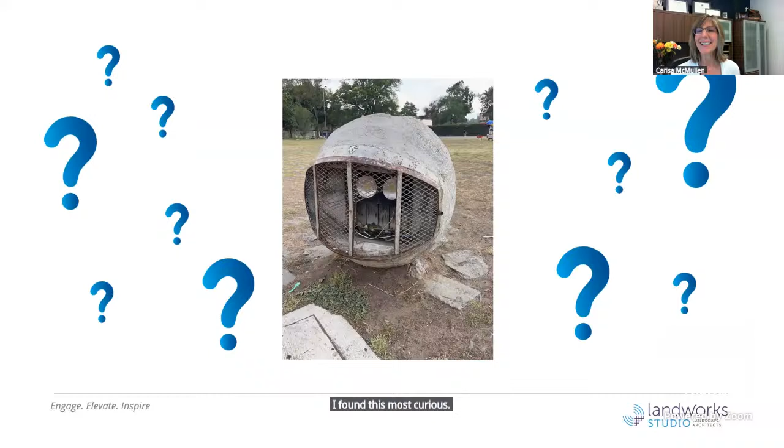I found this most curious. It's not something I've ever seen before, but it's in a prominent place on your university. I can assume it's lighting, and it reminds me of something I might see in Star Wars or something.

As I mentioned, we stayed in Coyoacan as part of our trip, and I was very impressed. I thought it might be worth taking a few minutes to share my experiences in some of the places you've spent time, and reflect on them. The public spaces in what I'd equate Coyoacan to as a suburb of Mexico City, like where our office is now located, were fantastic. But the particular attention and detail to the private garden spaces as we walked around the community was equally impressive. I loved the street experience, the ability to get a coffee in the morning, people watch and visit, and equally grab a beer at the end of the day.

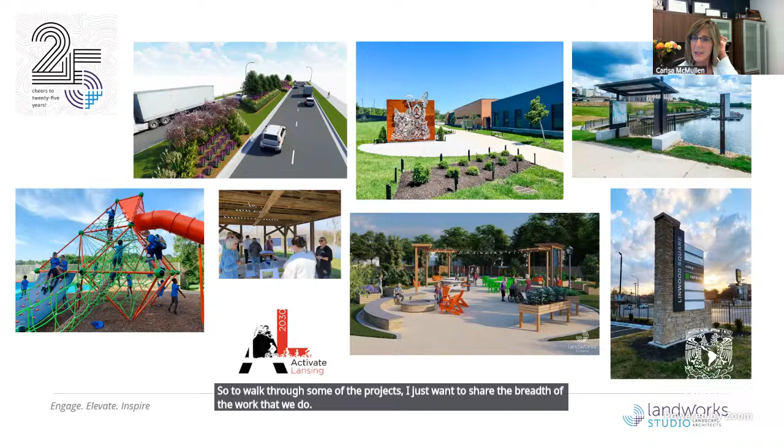So to walk through some of the projects, I just want to share the breadth of the work that we do, because we like to stay as diverse as possible, have the influence as many places as possible. The more diverse we are, the more people we impact with landscape architecture.

So this is a smattering. We like to say our services include transportation and streetscapes. We do commercial and mixed use, parks and recreation. We do signage and wayfinding.

We have an opportunity in that genre to educate. We can do environmental education panels and really establish the character of a community through some of the signage and wayfinding that we do.

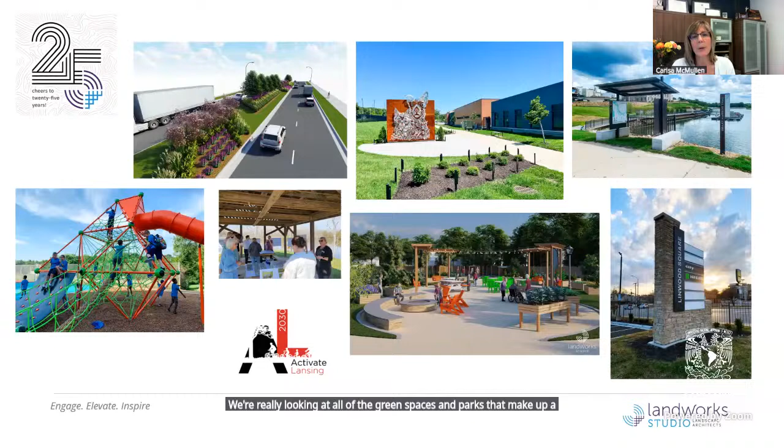Of course, our projects include public engagement, and sometimes that includes branding as we're doing planning documents and those kinds of things. So when we're looking at systems wide, which we do some of in that planning realm, we're really looking at all of the green spaces and parks that make up a community and looking at where the deficiencies are and where we can influence better outdoor spaces.

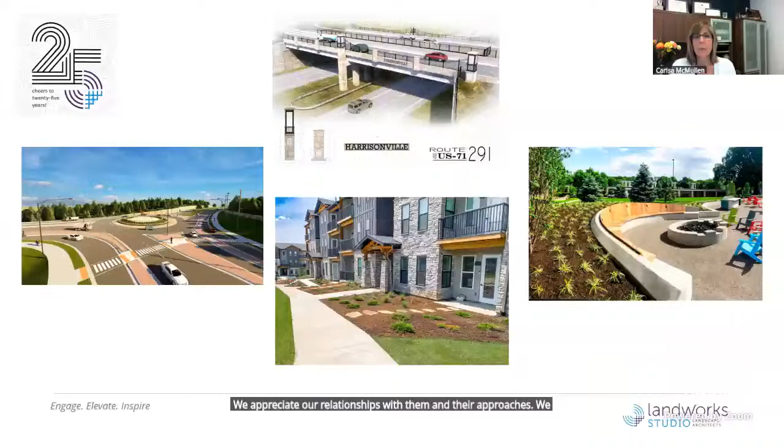A little more specifically, we do support architects and engineers, and we have a great group of people that rely on us to bring our expertise to the projects. We appreciate our relationships with them and their approaches. We've found groups that think similarly to us and really value what we bring to the table.

So we work on larger transportation projects that you see here, where we're bringing art into this roundabout, but really influencing the paving patterns and the plant materials and what that experience is like.

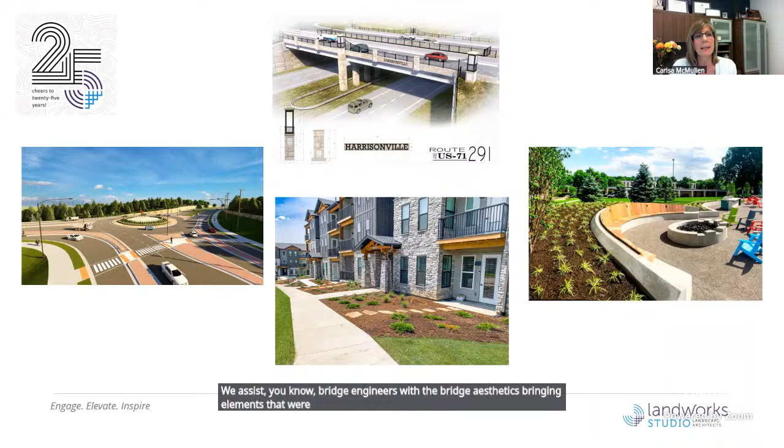We assist bridge engineers with the bridge aesthetics, bringing elements that were maybe historic from the community. These lanterns on the columns on this bridge were something that was representative of something that had happened in this community's history, and we were able to celebrate that on the bridge.

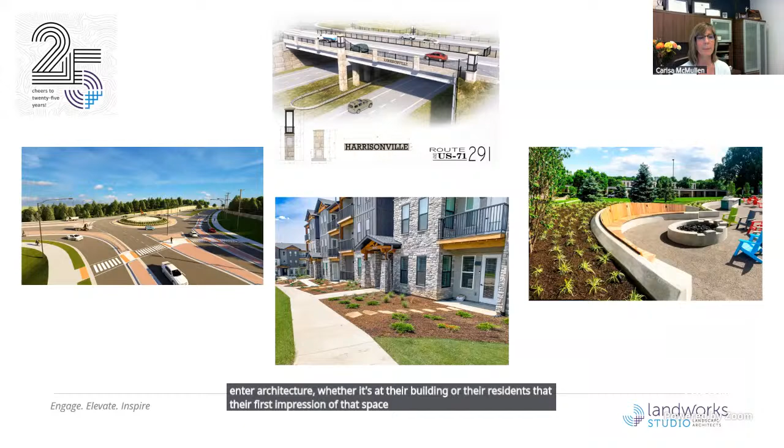And then we work to make sure that the experiences that people have as they enter architecture, whether it's at their building or their residence, that their first impression of that space is really a place that they want to be. As far as work environments, this is a fire pit.

It looks like it might be somewhere in a park, but this is actually in a corporate office park. So this space becomes active during the lunchtime or after hours. If a company wants to host an event or bring their clients, they're able to do that on the grounds of their office park.

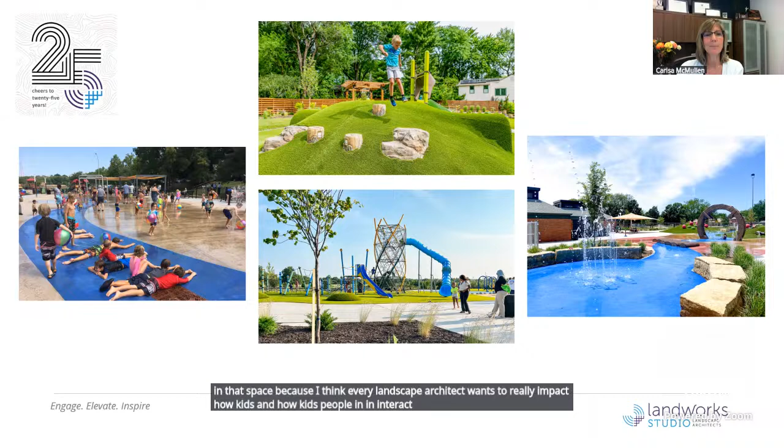Of course, we love parks. We love playgrounds. It gets very competitive in that space because I think every landscape architect wants to really impact how kids and people interact with the environment.

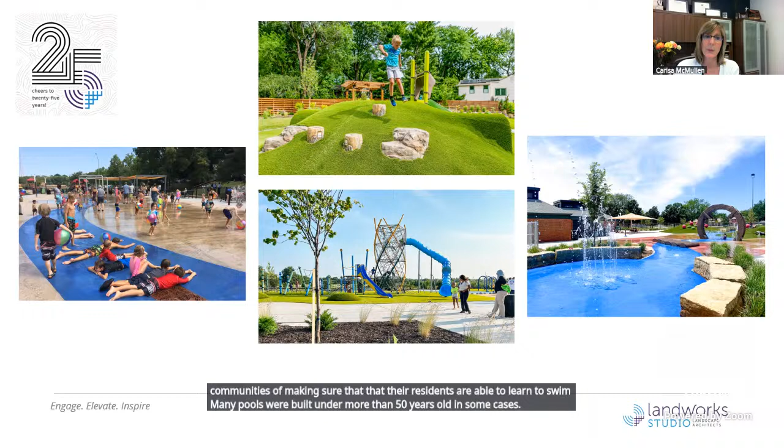We are seeing a lot of pools being converted to splash pads, and I know there is concern among communities of making sure that their residents are able to learn to swim, but many pools were built and are more than 50 years old, in some cases 75 years old, and the infrastructure is failing, and communities just don't have the resources to be able to build new pools in every instance, nor do they have the ability to maintain or staff some of the pools with the lifeguards and the expertise that are required to keep them safe. So in those cases, we're able to convert the pools and provide a water experience in more of a splash pad environment that can be come and go.

And lastly, we do some stormwater management projects. We're brought in to ensure that we're protecting our soils from erosion, keeping the soil from silting into the waterways, streams, and creeks that we have here. We're capturing the runoff and using it in productive ways, thinking about stormwater not as something that has to be dealt with, but how it can be celebrated as an amenity within some of these communities.

In the bottom image, we're filtering water off of a parking lot. This is a trailhead to a bike trail system. We can capture it in the bioswale and filter it out before it even gets anywhere close to the creek.

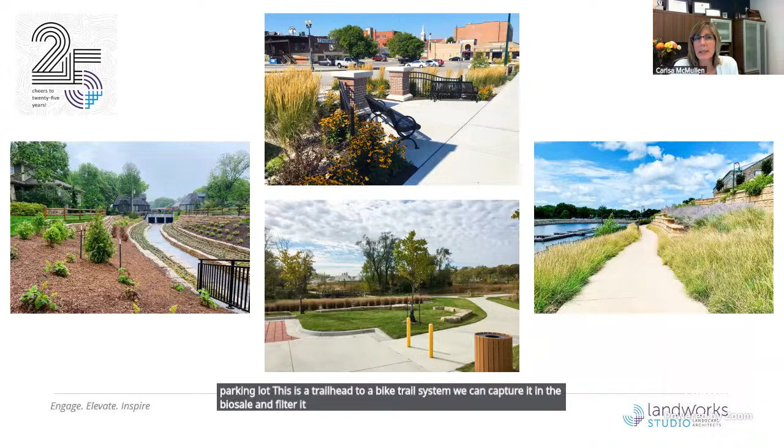The top image is actually a downtown area with a streetscape, and it's fascinating that we were able to put in some curb cuts the way the grades worked. We had a client that really wanted to capture that stormwater, and we were able to create these really nice sitting areas with some nice plant materials utilizing the stormwater that's captured.

And as we've grown, this is our 25th year. You can see that logo up here on this slide. We're able to impact more communities, larger spaces, and really have an influence on more people.

I know Monica is a baseball fan. I don't know if we have any football fans in the audience, but if you know the Kansas City Chiefs, they've had some good successful runs. I'm not a particular fan, but we had the opportunity to work with Patrick Mahomes and his foundation and build a playground in a community that really needed something for the kids to play. So if you know football, you might recognize Patrick Mahomes in that image.

The great part about this, we celebrated the history of Martin Luther King, and we were also able to become a catalyst. The community came out and spoke, and they said the playground is wonderful, and we will look forward to that, but we need access to the park from where we live. There were other infrastructure improvements that they really saw as more important to them. To the city's credit, they stepped up and are now in phases of taking care of some of those other issues as well.

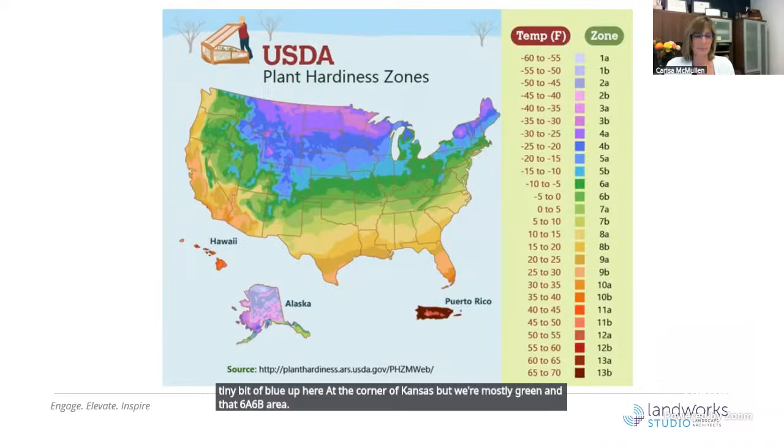And we do have a lot of Western history that we celebrate. Olathe has one of the stops on the Santa Fe Trail. We take great pride in the westward expansion, and we have three different trails that were pretty significant as folks were traveling from the East Coast to find their treasures and gold out west.

We have a lot of frontier military encampments that we talk about, that we preserve, that we share in our outdoor spaces. There are missionaries that traveled through here as well. When you travel through the landscape, you may see a headstone here or there. A lot of people died of cholera as they were traveling across the state, so there are many small cemeteries that still exist.

So while we're not riding horseback to work, we do have various landscapes that we are able to influence. And we stretch from the very rural, mostly on the western edge of that shaded area, to the east, to the more populated. So I thought it would be helpful to put into context where our projects are and how we treat those projects.

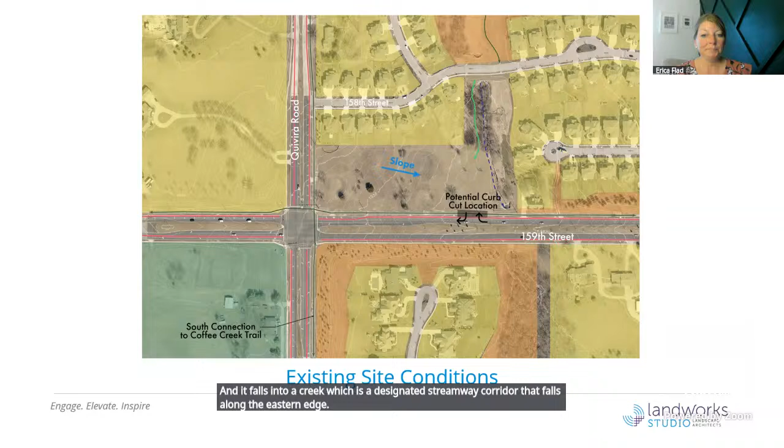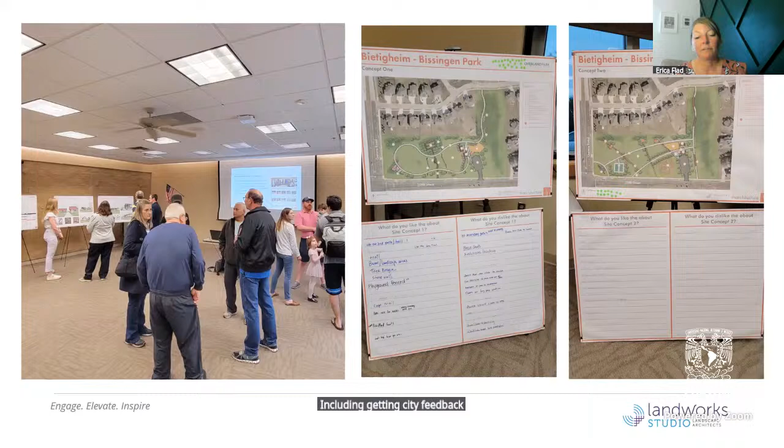This was the last public meeting that we had, and we showed two concepts that we had developed over time, including getting city feedback and feedback from our park steering committee. Generally, the amenities were the same, but we had two pretty different layouts to show, and we asked the residents what they liked and didn't like about each concept, which they wrote down on the boards. We did the same for the architectural styles as well.

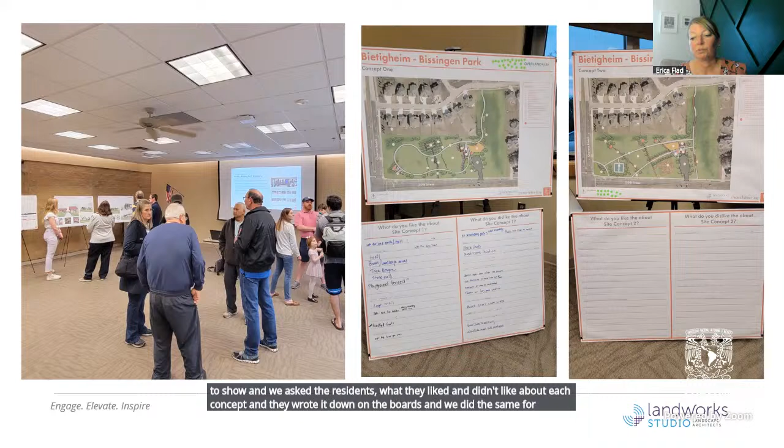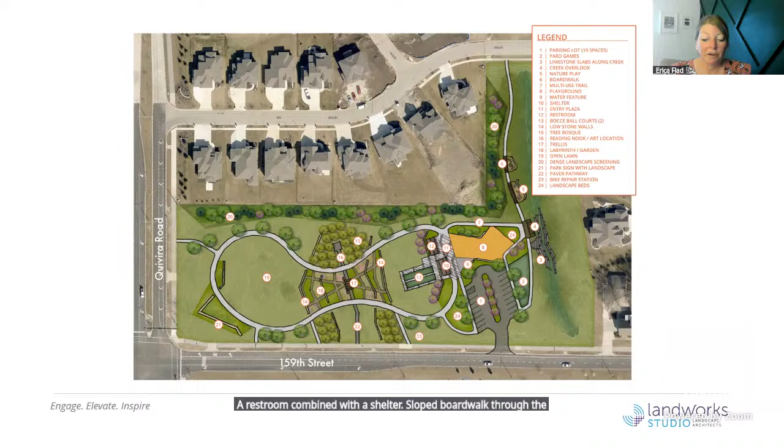The amenities included in this plan were a small parking lot, an area for yard games, two gazebo shade structures, a restroom combined with a shelter, a sloped boardwalk through the streamway corridor, a playground, a loop multi-use trail with connections to the north neighborhood and existing sidewalks along the streets, an interactive water feature, an entry plaza, synthetic turf bocce ball courts, a reading nook with an opportunity for public art, limestone slab walls and terraces as the site steps down that grade, a tree bosque, lush landscape, and interpretive signage throughout.

One item added later in the process was an underground cistern that will capture rainwater for irrigation purposes, just to bring some sustainability to a previously undeveloped site.

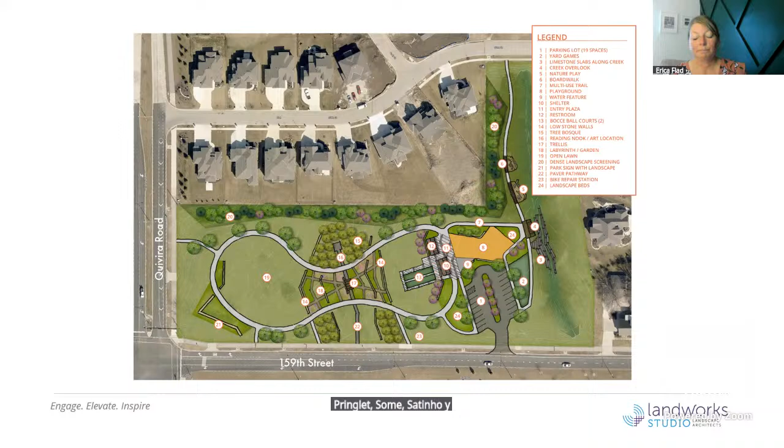Next, we'll show some renderings we created for visualization purposes. We find 3D renderings are a really great tool to show people who might not be used to looking at plan graphics. This is looking from the southeast corner of the site.

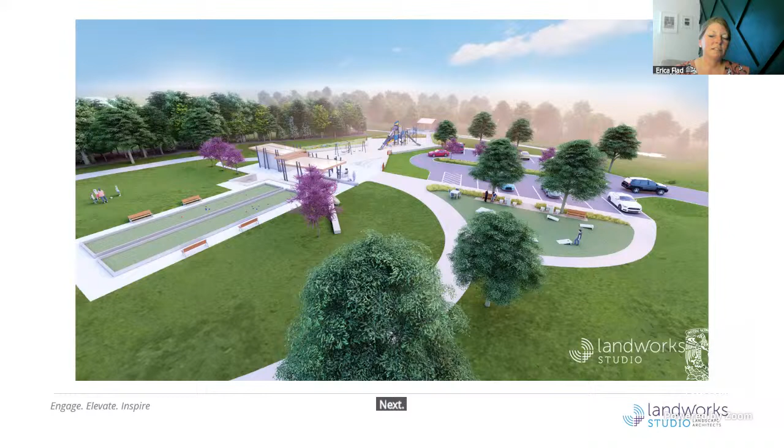This view is a little bit towards the center of the park, looking at the bocce ball courts. You can see the yard game area along with the playground, shelter, and restroom. One of the gazebos is located in the center of the park, and we had considered including a labyrinth in the design. That got a little complicated, so instead we decided to create a really beautiful garden space central to the gazebo.

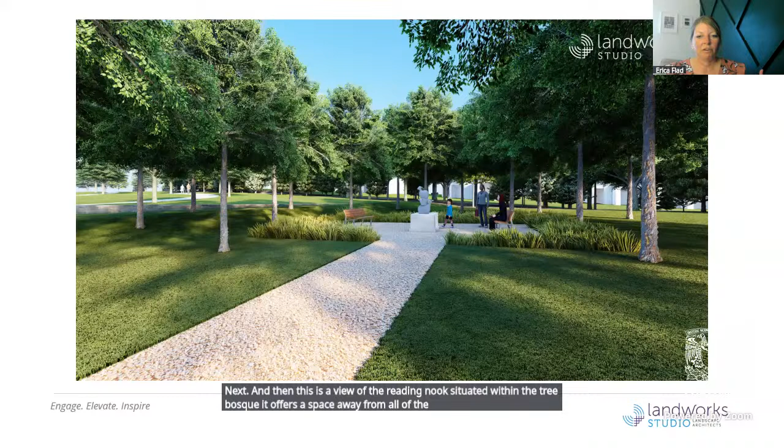This is a view of the reading nook situated within the tree bosque. It offers a space away from all the craziness that might occur with water, playgrounds, and games. There will be a public art piece developed by an artist from Germany, to be installed later this year.

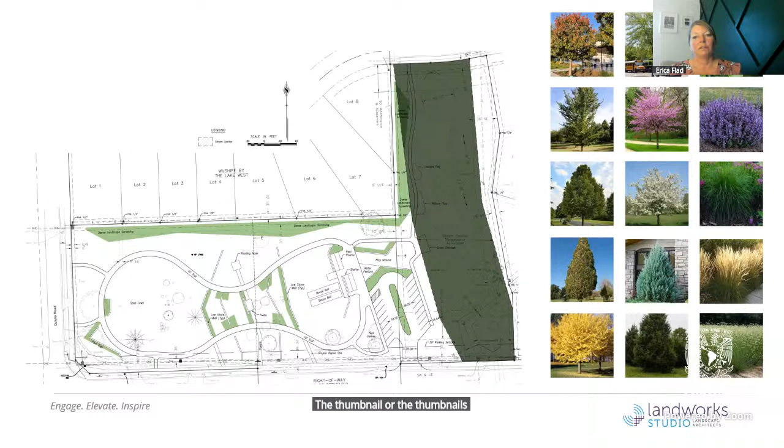The thumbnails on the right show the different trees, shrubs, perennials, and grasses included in the plan. In addition to creating a lot of seasonal interest with ornamentals, we tried to use some natives as well.

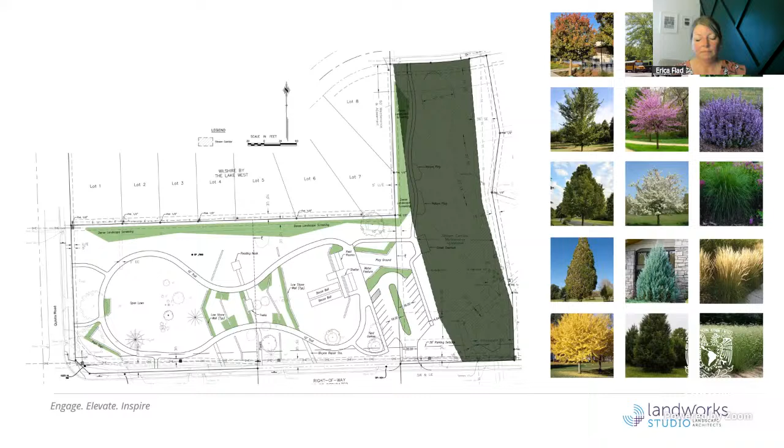Now we're getting to the exciting stuff. Last August we had a groundbreaking. It was really well attended and a great day. We had a Zoom portal that allowed representatives from Germany to participate virtually, even though there was an 8-hour time difference—I think they were maybe watching soccer at the time, but that's all right. The mayor and the artist providing the artwork for the park were on the call.

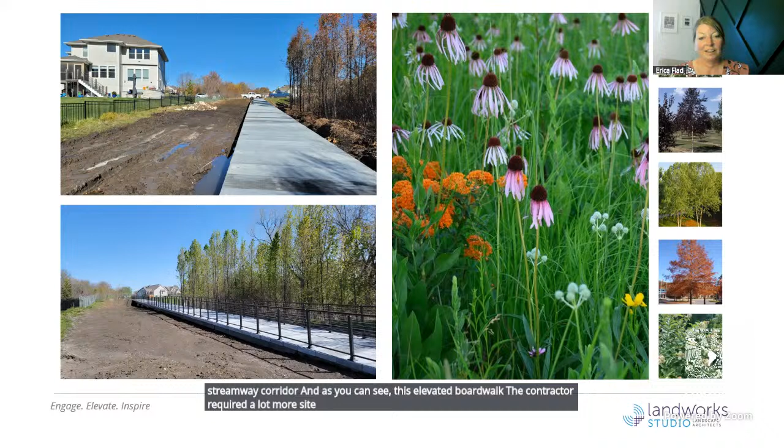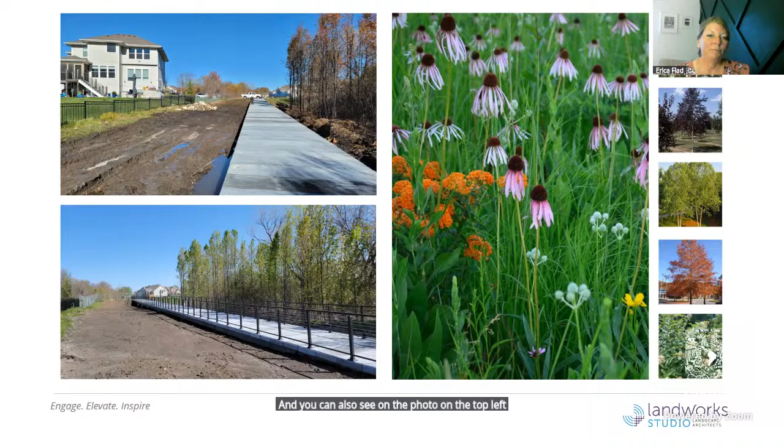In this slide—okay, so I said we'd come back to the streamway corridor—as you can see, this elevated boardwalk required a lot more site work from the contractor to get installed, so we ended up disturbing a lot of the corridor. You can also see in the photo on the top left that we ran into some drainage problems. By the time the boardwalk was installed and the contractor graded the site, we had to change up our plant palette in this area just because the soil conditions were a lot different than what we had originally expected.

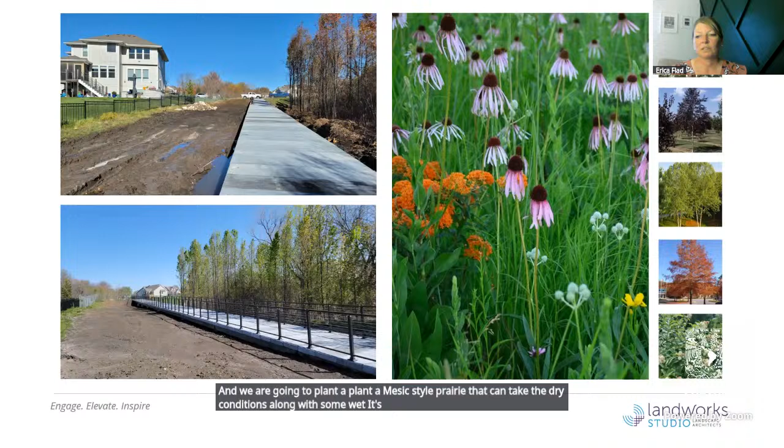But we were able to switch out some trees for ones that could tolerate a wetter environment, and we are going to plant a mesic style prairie that can handle both dry and wet conditions. It's mostly short grass with some wildflowers in it. I think that will be really nice and create a lot more interest than just having turf grass there.

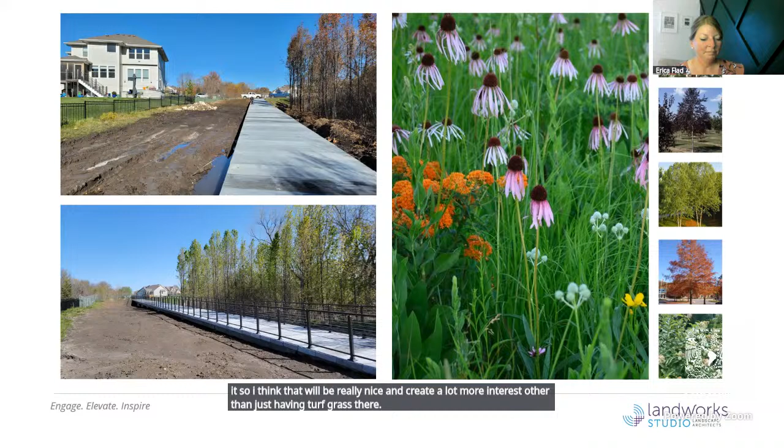Lastly, we are really looking forward to this being completed in September of this year. It will be a powerful symbol of international collaboration that will really enrich Overland Park's community. It will spark creativity and it will foster meaningful connections.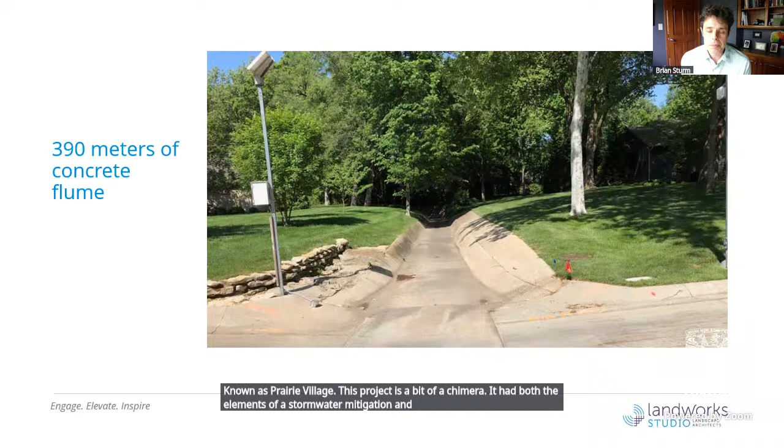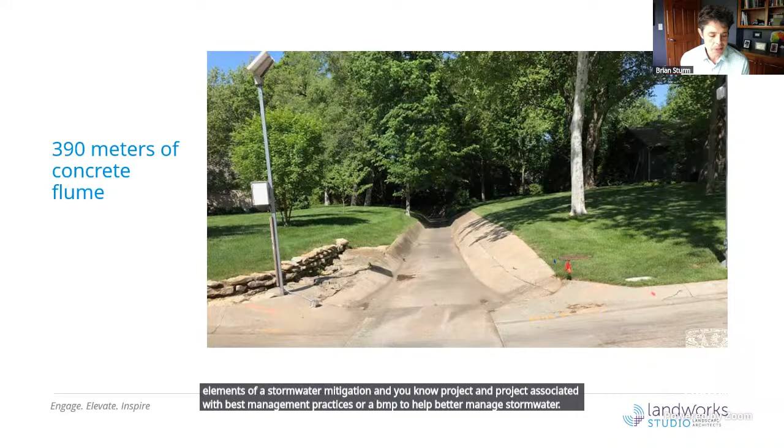This project is a bit of a chimera. It had both the elements of a stormwater mitigation project associated with best management practices, or a BMP, to help better manage stormwater. But as you'll come to see, it really also had a lot to do with residential design and garden design on either side of these channels.

So there were about 390 meters of concrete flume, just like this, that this project ended up replacing. That was important work, as you'll see on the next slide.

These concrete flumes crossed both of the streets that I mentioned earlier, Delmar Lane and Fontana Avenue. These low water crossings, perhaps when the neighborhood was first developed over 60 years ago, maybe didn't pose that much of a hindrance. But over time, this neighborhood and other neighborhoods upstream have completely filled in this region of landscape with homes, rooftops, streets, parking lots.

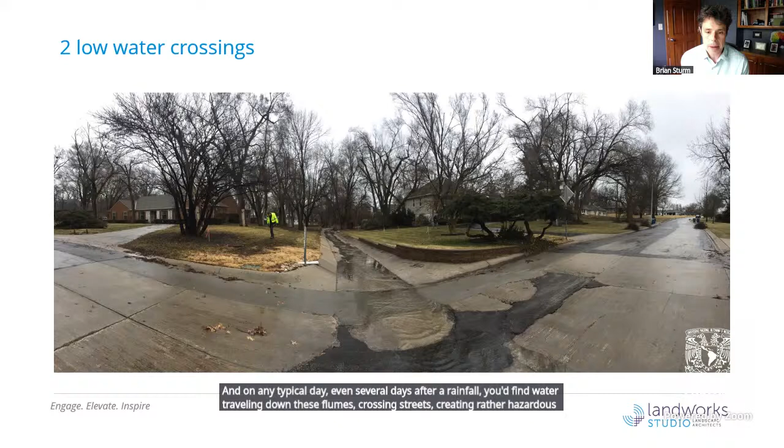And on any typical day, even several days after a rainfall, you'd find water traveling down these flumes, crossing streets, creating rather hazardous driving conditions. And as the next slide illustrates, really the project was as much about replacing those man-made concrete channels as it was to serve the neighbors, the homeowners that lived on either side of those.

So like I said earlier, we replaced about 390 meters of concrete channel in this project, and we'll show how that was done. We also worked very closely with 12 different families that lived on either side of these channels.

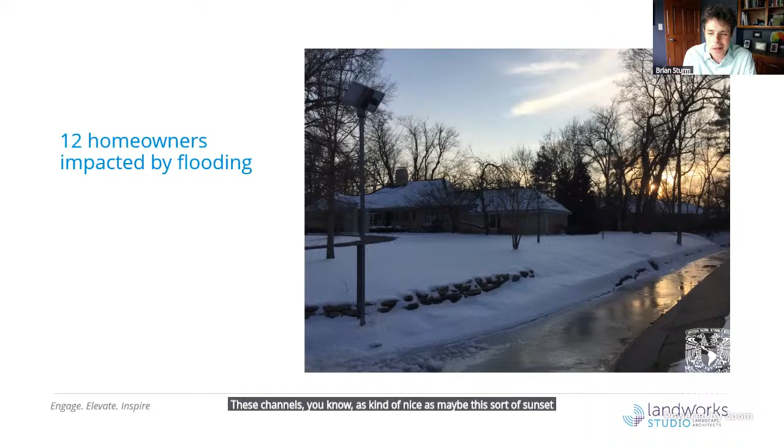These channels, as nice as maybe this sunset in the winter looks, living next to a canal, as shown on the next slide, in other times these channels posed a really terrible hazard in this neighborhood and other neighborhoods around. It really didn't take a very significant rainfall event to generate a tremendous amount of water.

You could have a rainfall event of the type that's typical, you know, 4 or 5 times a year - maybe just 1 to 2 inches of rain - and it would create a tremendous amount of flow and velocity and drive cars off the road downstream, right up to these large pipes that would then convey large amounts of water further downstream. So the neighborhood came to a point, and the city came to a point, where they were ready to replace these channels with something different.

There was damage to homes, damage to cars. So the city was committed to doing something significant. Now, as we'll see in this slide, Prairie Village on the map is a relatively small suburban town. It's only about 16 square kilometers.

It has roughly 22,000 folks that live there. It's largely residential, a classic post-war suburb, developed pretty quickly after the Second World War over probably no more than a 20-year period, largely by just a few different development companies building homes that at the time were very affordable, ushering in tremendous and very fast growth. These days this is a pretty expensive community to buy real estate in. Even homes that are 50 or 60 years old sell pretty well. The folks who live in this neighborhood were reasonably affluent, had lots of opinions, and lots of desire to make change. That's what this project generally sought to do.

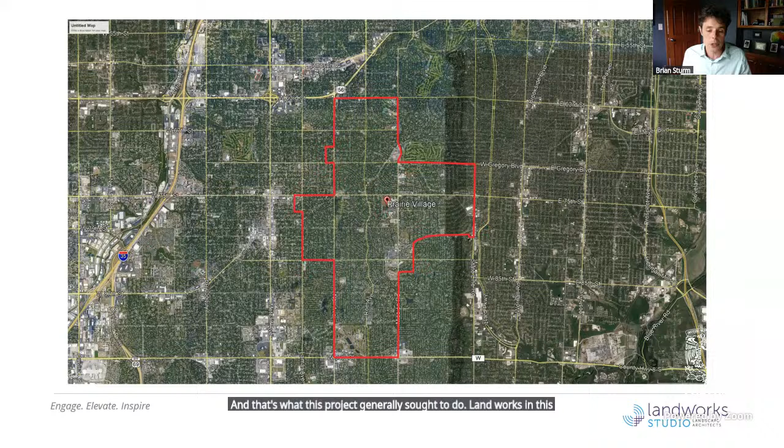Landworks on this project worked very closely with a civil engineering firm devoted to water resources and water management, and we worked very closely with the city of Prairie Village to take the steps to make these changes.

In general, humans have really a love-hate relationship with water. We're drawn to water as a species - our favorite vacation spots tend to be by beaches or by lakes. But when we get a whole lot of water unexpectedly, we usually go bananas and get pretty scared. There are stories as old as the Bible and other ancient tales before that speaking of devastating floods. So if there's water about that we don't like, we find a way to get rid of it, and get rid of it fast. We bury it, we put it in pipes, we send it off of our landscapes as expediently as we can, so that we can do whatever we want with that property.

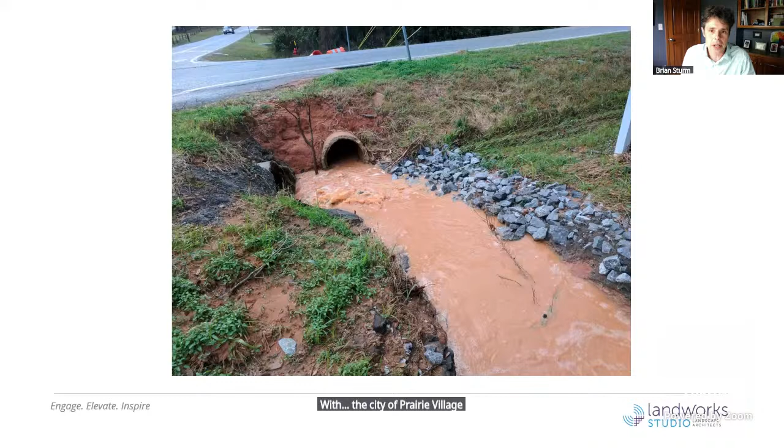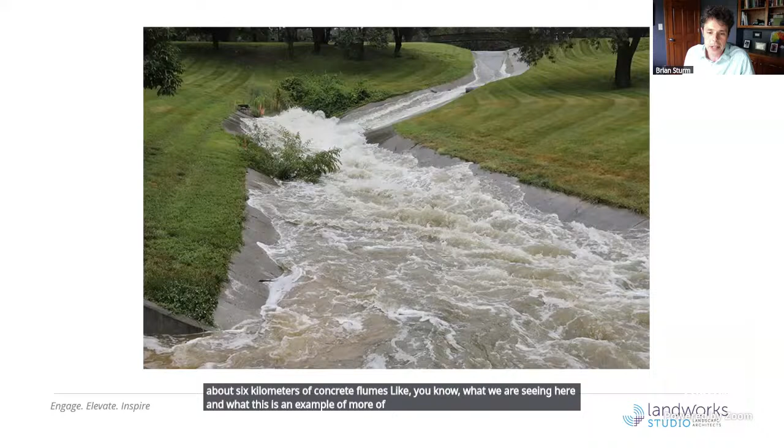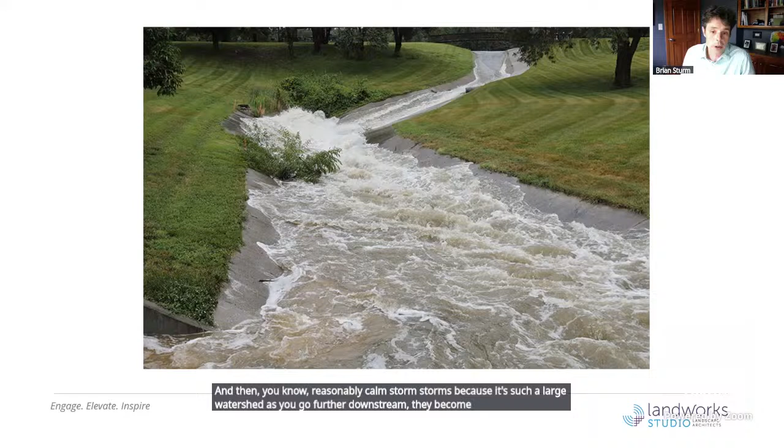As I said, with the city of Prairie Village - only 16 square kilometers - they do not have a single natural stream corridor in that entire town. They have about 6 kilometers of concrete flumes, like what we are seeing here, and this is an example of more of that sort of thing in Johnson County. Prairie Village isn't alone; there are other neighboring communities nearby, you'll regularly drive past these. In reasonably calm storms, because it's such a large watershed, as you go further downstream they become torrents. It's just a problem created by overdevelopment, underdeveloped storm sewer systems, and really avoidance of this whole problem for decades and decades.

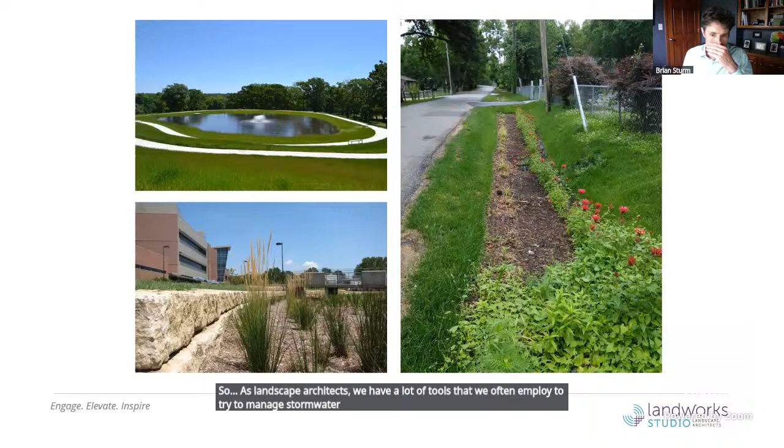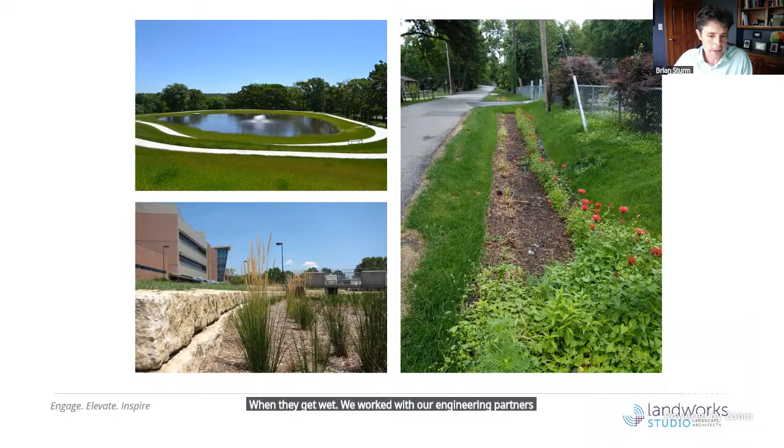As landscape architects, we have a lot of tools we often employ to try to manage stormwater with green solutions - using vegetation, using engineered soils to help infiltrate water, such as rain gardens or constructed wetlands. Even dry detention cells that are planted with native vegetation and under many conditions are dry, but help absorb and infiltrate stormwater when they get wet. We worked with our engineering partners on this project to employ a little bit of all of that to try to come to a solution for this neighborhood.

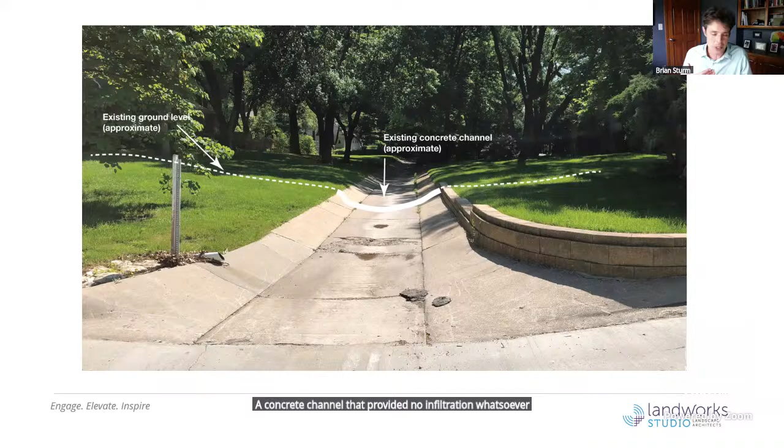As we see on this next slide, you had a concrete channel that provided no infiltration whatsoever for water - it was designed just to carry it and convey it, push it downstream. It's less than a meter deep right there in the channel, and maybe only a couple meters at most below the elevation of some of these nearby homes on either side. It's a channel that is maybe 3 meters wide - just a relatively small space.

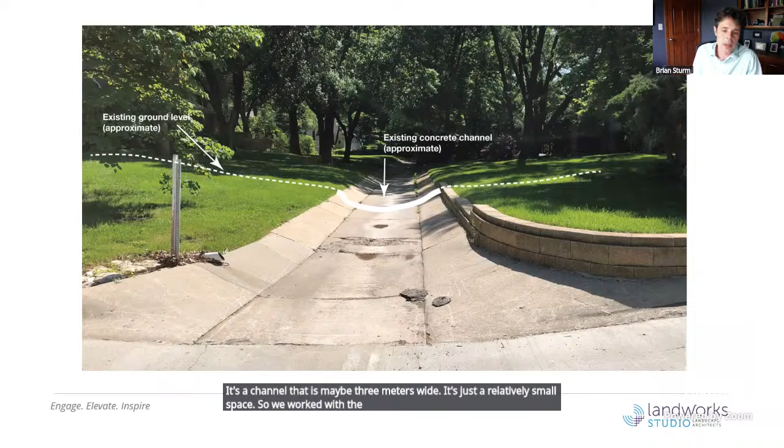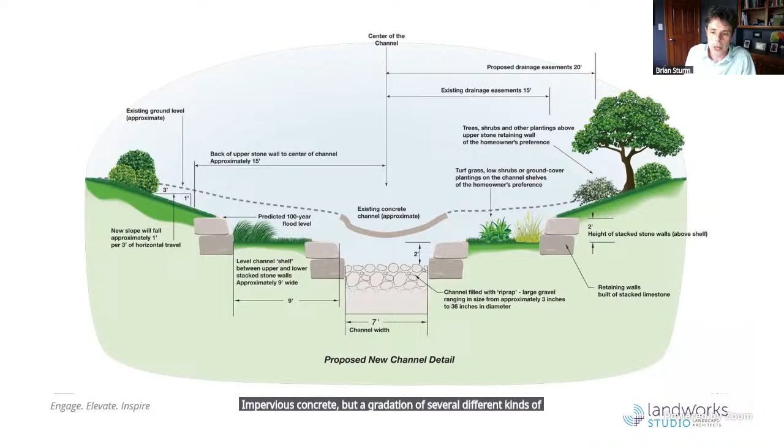So we worked with the engineer, with the city, with our public partners to come up with a solution where we really dropped the depth of that channel and made it an open bottom channel - not impervious concrete, but a gradation of several different kinds of natural stone, to allow during small storm events for water to pass into there and relatively quickly infiltrate. But then above that, still below that existing concrete channel depth, we created a more broad shelf - a much wider channel with a width of something close to 9 meters - and the benches or shelves on either side of the low channel would be planted with a variety of different vegetation, to allow for not only infiltration of water, but also slowing that water velocity down a little bit, so that downstream the water wasn't coming at such a crazy speed.

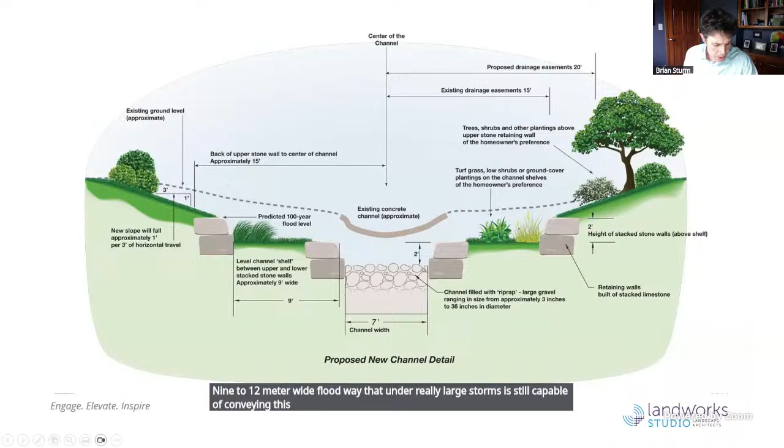Once we get out of that shelf, we're still in this 9 to 12 meter wide floodway that under really large storms is still capable of conveying this water. Once you get up there, you're back to these neighbors' yards and their lawns and their various ornamental shrubs and trees, and that's where the project starts to become something a little bit more than stormwater management and stormwater design.

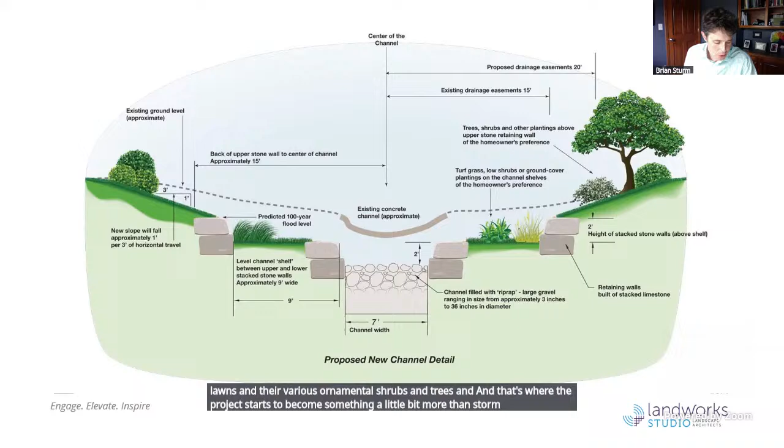We have a practice that embraces stream restoration. Over the years, we've done a number of projects that help civil engineers soften these projects. We do that with plants. We're good at plants, at specifying plants that'll work in difficult situations. And we're also good at dealing with people and working with folks to give them some agency in a project like this. So that's really where our job began.

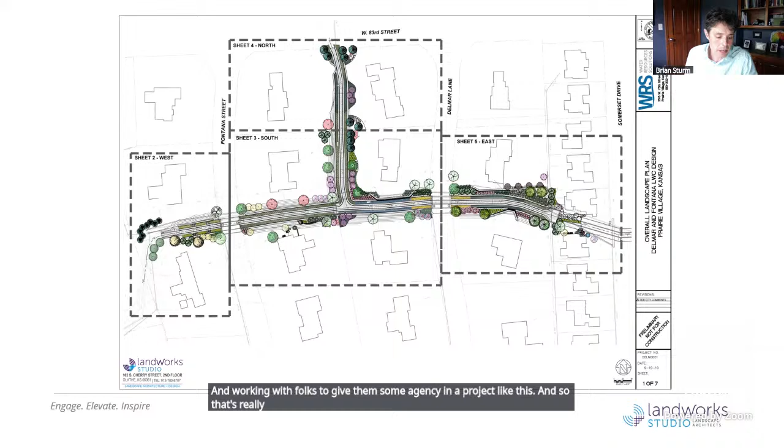If we look at the next slide, we were brought on first and foremost to not only design and specify plans for the situation, but to engage with the public. That was invaluable to the success of the project—keeping these homeowners informed of the schedule of the project, whether it involved our design or not, whether it had to do with civil design, later on utility relocation, or construction timelines. That was hugely important to keeping folks understanding of what was going on and calm.

As you'll see, there's a tremendous amount of disturbance this project created in this neighborhood. Our work helps soften the impact of that construction, both in a metaphorical sense of being there to hold the hand of these neighbors, but also giving them something to look forward to in terms of the finished product, which was kind of the re-greening of their properties. More than anything, this engagement just gives folks agency—it gives them power to interact with the project and know that they have a role to play.

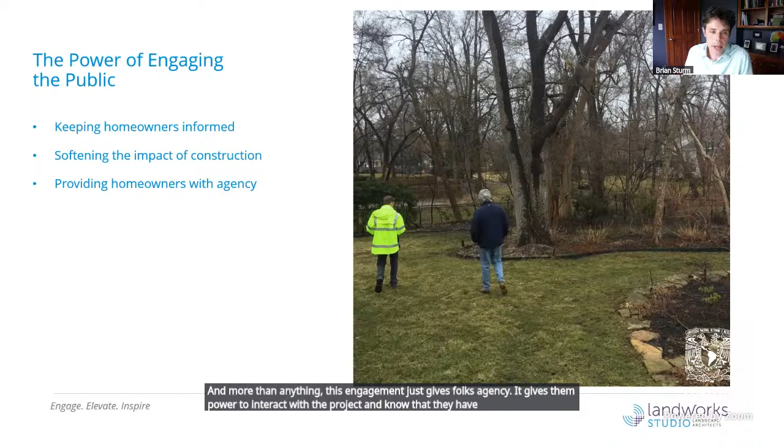So one of our first missions in doing design was to focus on what sort of plants would be appropriate in what I call the shelf, that bench that's just above the channel. There are a number of ways to go with that. We devised a number of different schemes for property owners to consider. But there were a lot of criteria to consider for this specific plant zone.

We had to select plants that had a certain sort of roughness to them, something that would help slow water down and could withstand the force of sometimes fast-moving floodwaters. These were plants that were going to be in sun—any day where it was sunny, they were going to be fully exposed—and then other days they were going to be inundated with water.

These had to be plants that these homeowners would be comfortable taking care of once the project was done. This is their property, and it was something they would have to tend to. So that was a bit unique, and it had to be something they found aesthetically pleasing, something they would want to look on. We couldn't always go with a really robust mix of native stream vegetation, because some of these folks have no appetite for that sort of thing. This isn't really a wild space—it's very suburban.

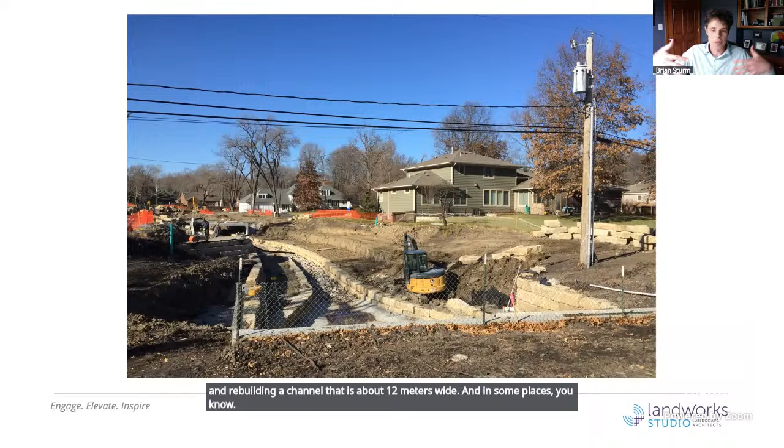Our second job after selecting these plants for that very fine-tuned stormwater function was to help mitigate the impact this project had beyond that. The city had a requirement that any tree disturbed by the project, and there were many—a good 80 to 100 trees taken out—would be replaced.

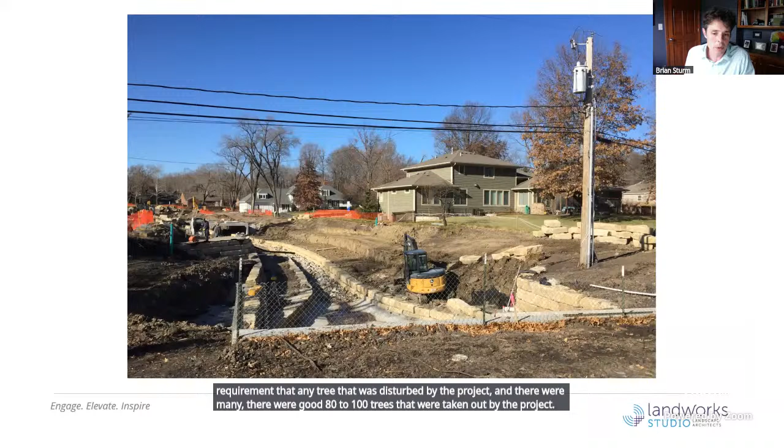The project went eventually much beyond that. In the next slide, we have an example of a plan we developed with one of the homeowners. We ended up going and working with each homeowner on an individual basis. This wasn't something we did in a public forum. This was really where I, along with maybe one of the city engineers and even one of the stormwater engineers, would make time with these folks and visit them at their house, sit on their back deck, months before the project began.

To understand, here are the areas that are going to be impacted. What do you want to see? What can we do to make this again a backyard, a side yard that you're going to look forward to spending time in? We did that in plan view, and then we also did images of every type of plant being considered.

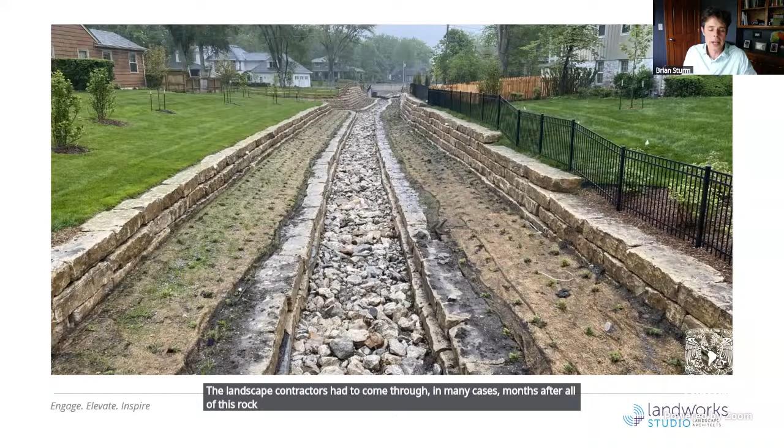Now this is extremely close to when construction was still wrapping up, and you can see the natural channel there with the riprap, the rocks, the various gradations of rocks, and then those shelves. I think in these two instances, on either side, the landscape contractors had to come through, in many cases months after all the rock and soil had been moved, and puncture that erosion control blanket thousands of times to get these small plants to grow in there. But really, the landscape up and out of that channel was also something we had to design for these folks.

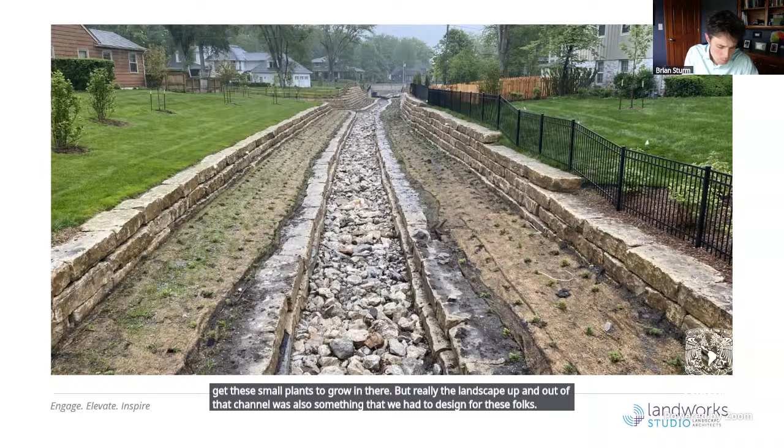It got built in relatively efficient fashion for a project like this. These infrastructure projects don't usually go quickly, but this one was done in about 12 or 15 months.

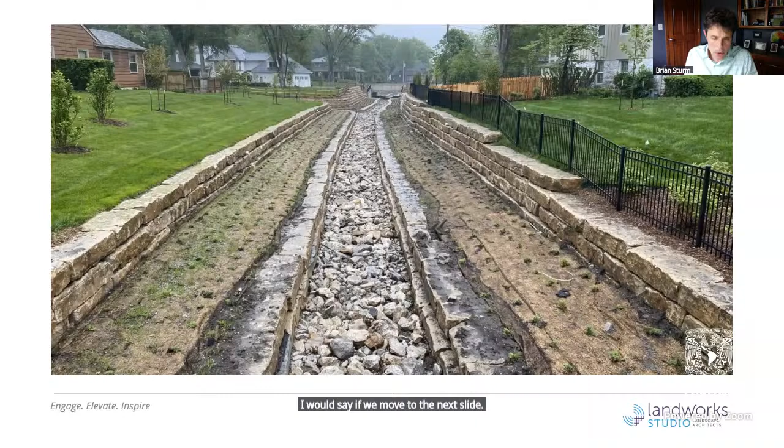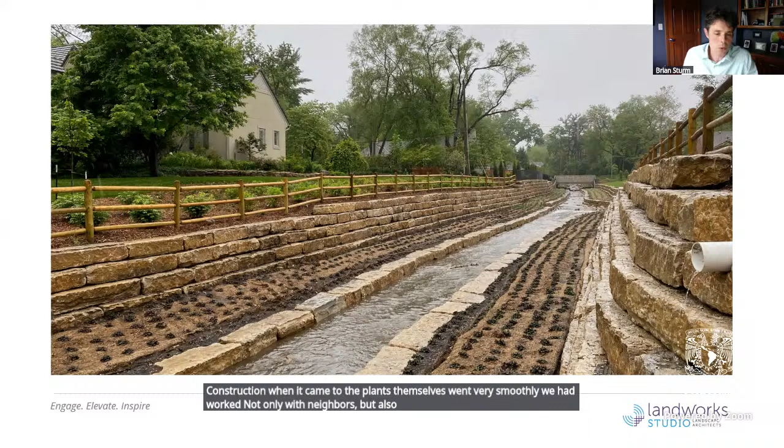Construction, when it came to the plants themselves, went very smoothly. We had worked not only with neighbors but also landscape contractors to source plants that we knew would be available, so there were very few substitutions during the construction period.

So what did we learn? I think we have just a couple more slides left. I will say plant selection matters—coming up with plants that would be reliable in these difficult conditions, but that people would still embrace and want to maintain in their yards, was huge. The personal engagement with neighbors was invaluable to the success of the project, not just how it looks in the end, but how the neighbors and the neighborhood embraced the project.

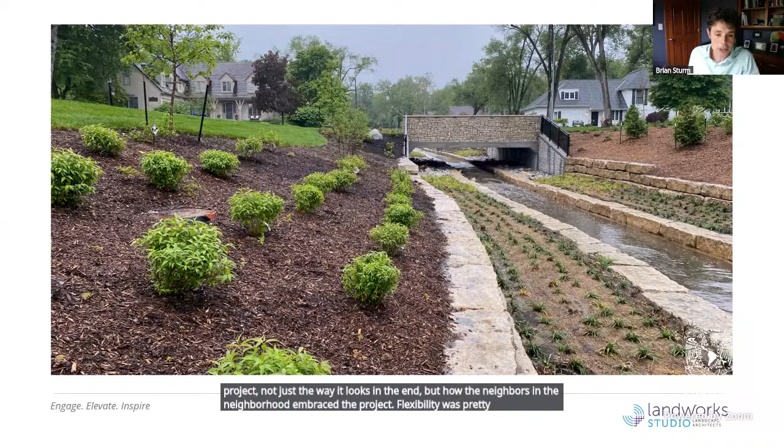Flexibility was pretty critical, at least during the design process. We were fortunate to have the staff and the workload at the time that allowed us to do a lot of personal consultation over a 3 to 4 month period. But overall, Landworks likes to brag that a landscape architect in general was critical on this project.

To be able to create vegetation that really enhances the stormwater function of this channel, select the right vegetation for the right spaces, that also creates aesthetic appeal for the folks living on either side, and builds public support for a very expensive infrastructure project. So one that we were really grateful to be part of, and I'm glad to be able to speak about it with you all this evening. Thanks so much.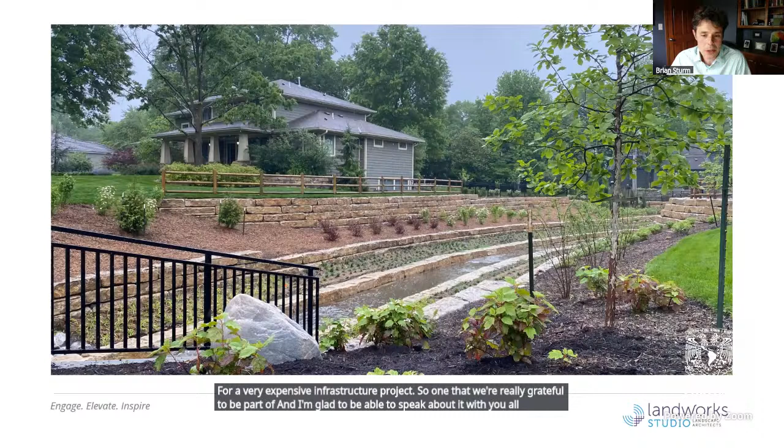Thank you, Brian. I'm going to wrap up with our final case study this evening and share a little bit about Meadowbrook Park. It's interesting, this is also located in Prairie Village. So you saw the aerial view and Brian explained how tightly compact and how small that area was. So that just explains how important this green space was to the community of Prairie Village and now has become very important to the county as well.

As the landscape architect, we were selected by the county as the lead consultant, which was our largest project that we had been selected to work on up to that point in time. This was in about 2015. We started doing the master planning. As the landscape architect, we were directing 5 phases of development. We had a conceptual master plan that we put together, including the public engagement, the site analysis, and that type of work.

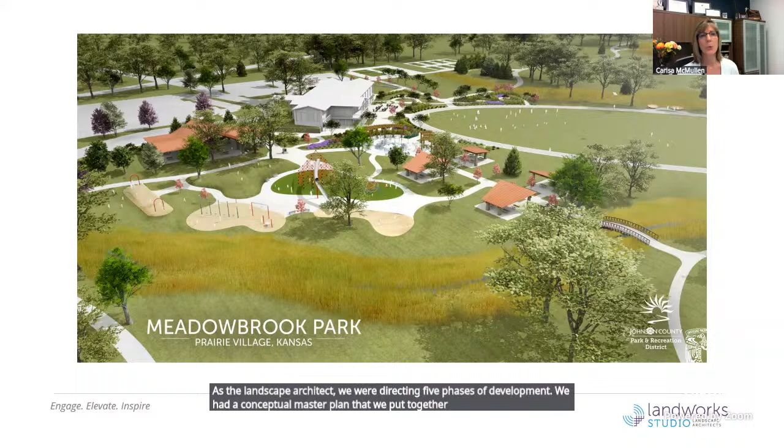Once we started on the project, the county was hoping to be able to use a building that was on site, and that was not able to be the case. It wasn't feasible and or financially advantageous. So we had an architect that was working on a building at the same time under a separate contract that we put together.

Some of the key infrastructure that was included: we had pedestrian bridges and trails, an environmental learning area on the south part of the property. There were shelters, pickleball courts where a swimming pool used to be, a sledding hill, a destination playground, and a variety of different other amenities for this community at large.

The goal was really to create a destination park that was balancing recreation and education and a focus on sustainability as well. We wanted the ability to elevate the perception of landscape architecture in a community that was revitalizing, to allow this green space and really be inclusive for all ages and for all abilities.

So we were able to capture this piece of property because it was a golf course that had gone bankrupt. This is an image of what the golf course looked like - you could see the sand trap no longer has any sand, but we were working with some really beautiful trees that were on the property. The opportunity and excitement to turn something that was private over to the public really was something everyone was very excited about.

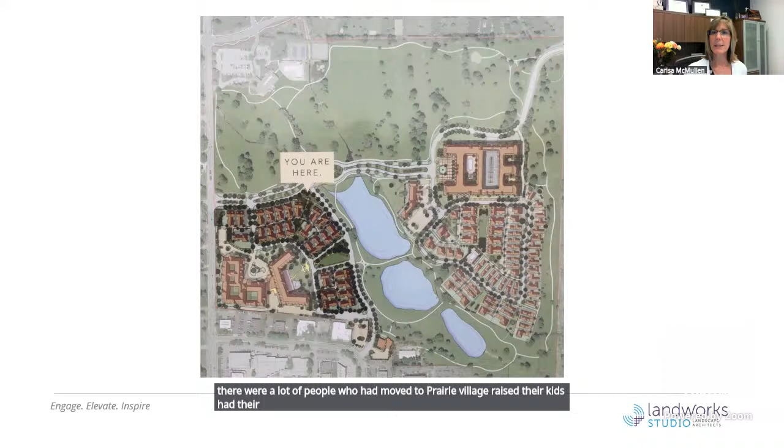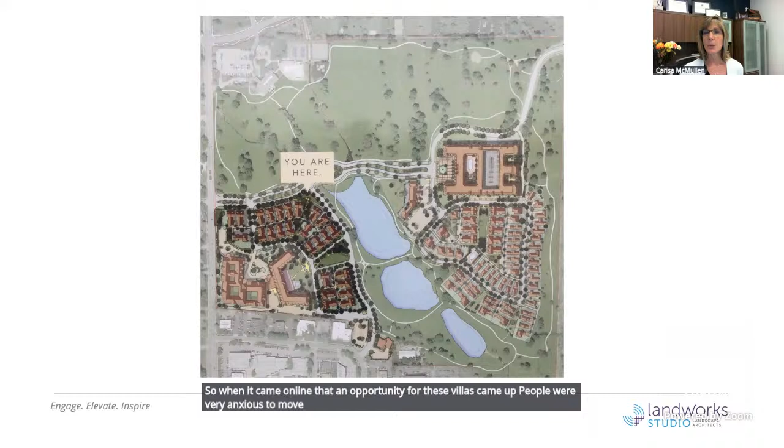What we learned through this process was there were a lot of people who had moved to Prairie Village, raised their kids, had their families, the kids had grown up, and they were still in the home that they no longer could maintain or wanted to maintain. So when it came online that an opportunity for these villas came up, people were very anxious to move out of those homes into a newer development. And what that did was free up these homes for new families to move in with kids. So this aging community really changed the demographics and the population that was in Prairie Village and added a more diverse population of people to this community.

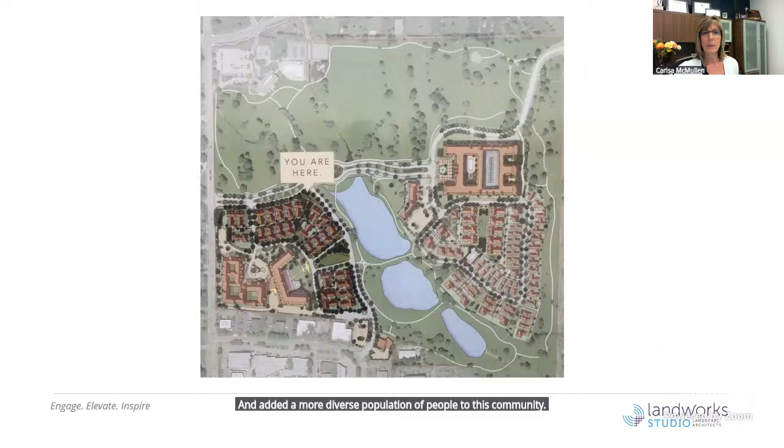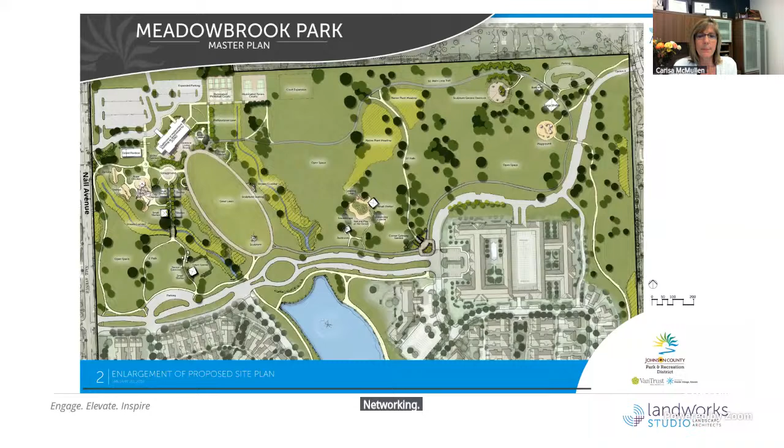You can also see the fabulous trees that are on the property now, as they were changing for the fall season here. And we did really work hard to ensure we inventoried every tree that was on the site and retained all of the trees that we could for this property.

I would say I was an advocate for removing a few more than the client had an appetite to remove. Some were just past their life, and I knew once all of the new improvements were implemented that they were going to stand out. But we kept them, and they were happy with that, and they're still alive to this day.

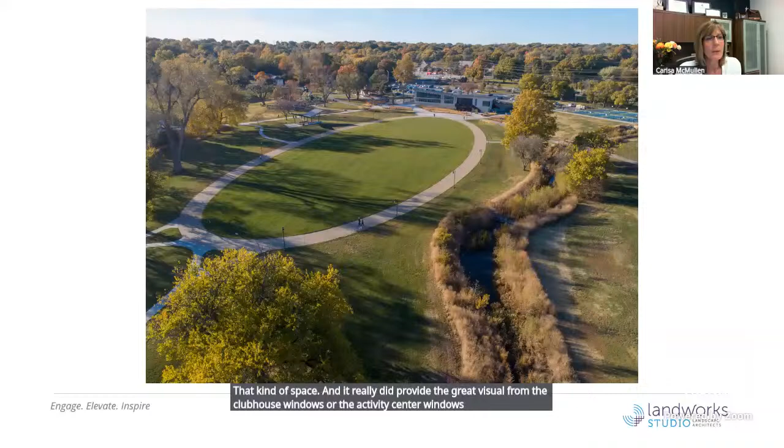The design really focused around this grand lawn. It was an opportunity for open air activities, kite flying, festivals, that kind of space. And it really did provide a great visual from the clubhouse windows or the activity center windows, all the way down the great lawn and then across the ponds on the south part of the property.

I mentioned the activity center. It was designed as the threshold to the park. It really had a focus on sustainability. They had chosen to make a $4 million investment for this building once they were all in. It was really exciting because they have a day camp preschool that was included as part of this activity center, which was another thing that was much needed in this neighborhood that didn't exist.

They had determined that they were going to focus that day camp and early childhood education on environmental and sustainability lessons. So they have a playground that's private for their facilities, but it's got sand tables and water tables and all kinds of other things to teach kids about natural systems. You can see here the building was complemented with a lot of native grasses.

And this next image shows how we chose to use that planting plan to really reinforce both the arc of the grand lawn and also the angles that were very prevalent as part of the site and the building architecture and roof lines.

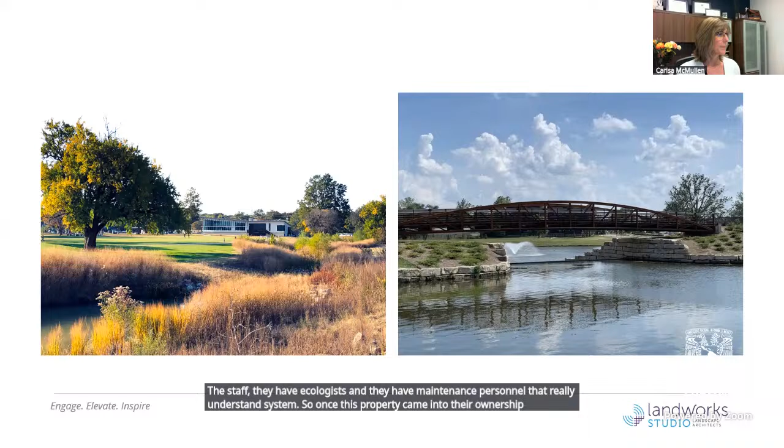We were able to do that, and I'll show you a picture of that here in just a minute. But the great thing about this Park and Recreation District is they have phenomenal staff, including ecologists and maintenance personnel that really understand systems. So once this property came into their ownership, the creeks and drainage channels have really been treated well, and we don't anticipate any silting issues moving forward.

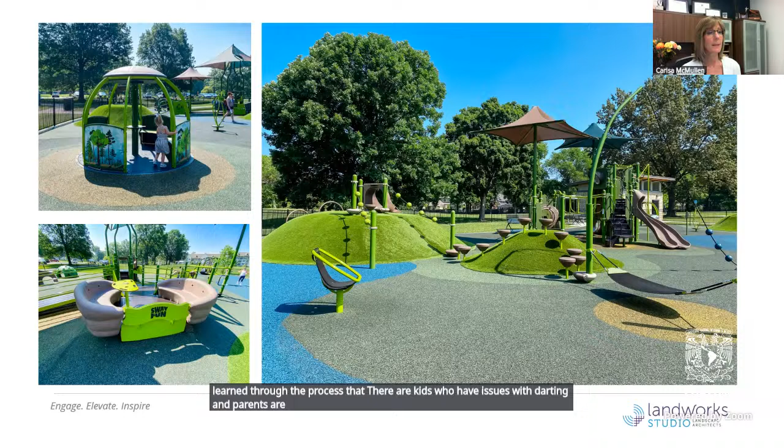One of the most important things in an inclusive playground like this is, you can see in the background, the playground has a fence. Initially, as a landscape architect, you don't want a fence that keeps people out or makes it look like a barrier. But really, we've learned through the process that there are kids who have issues with darting, and parents are really concerned that their kids might take off. So the fence keeps them safe and keeps the parents more comfortable in spaces like this.

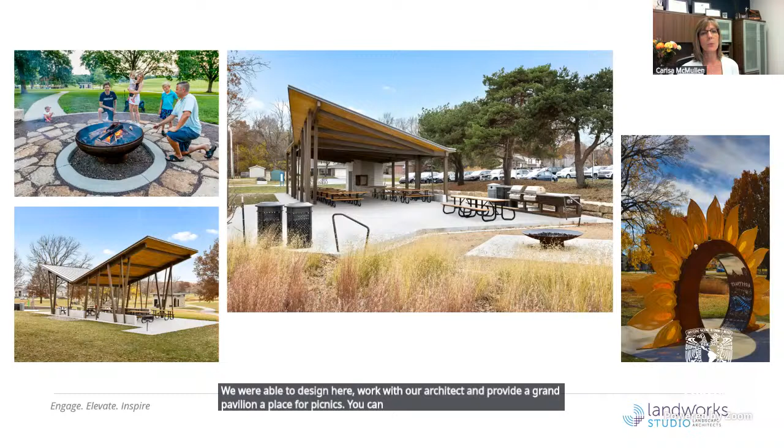We also made sure to include passive areas in the park with so much property and beautiful landscape. We worked with our architect to provide a grand pavilion, a place for picnics. You can see there's a gas-fueled fire pit and some grills, and a fireplace inside the grand pavilion, so it's really a nice place for families to gather.

East of the park, we've got a wood-fired pit. The intention was that this would be for scouting troops or family reunions, to be able to come out and roast marshmallows and really have a camping experience, but within the urban environment.

One of the exciting things for me is having the opportunity to work with and see artists generate something that enhances any of the parks we work in. This was just recently completed in the last year or so. Our master plan showed areas where public art would be great, something interactive that would work within the park community. And Kansas is the sunflower state, so the artist took that and expanded it.

To our surprise, she found people who represented various communities and groups who all had a part to play on the property before it became a golf course. It was amazing how many different groups and nationalities had a hand in the development of this park, and their story all gets told by the artist in the carvings inside this beautiful sunflower.

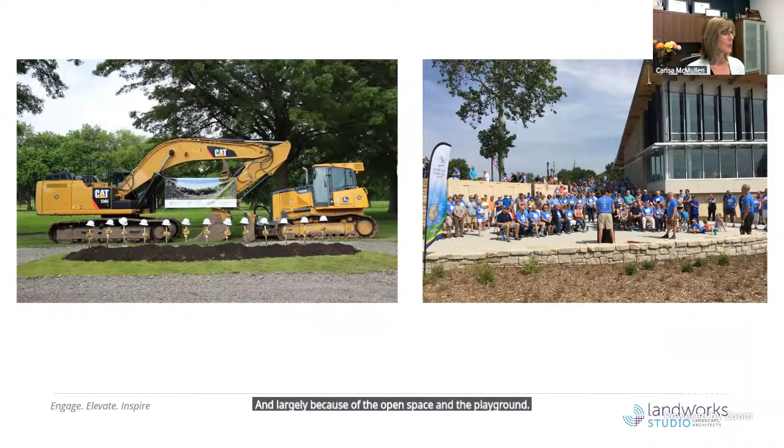Erica also mentioned the groundbreaking. This is another one of those public engagement opportunities. Our agencies here love to turn up a little bit of dirt, paint some shovels gold, give the politicians the hard hats, and allow the photo opportunity. And so they always take advantage of that. We did that on this park as well.

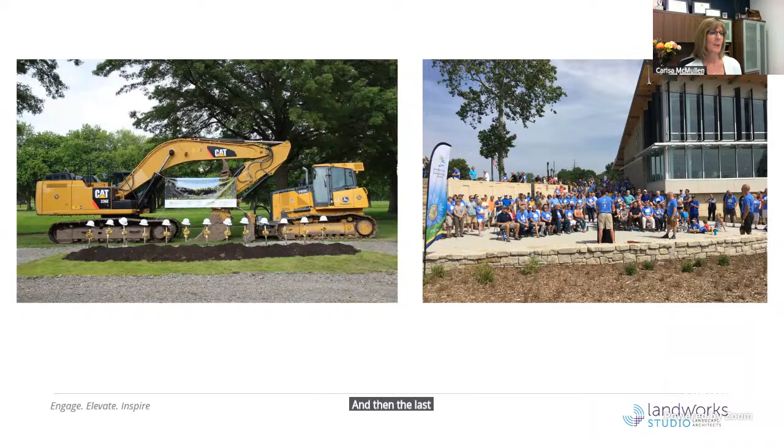And then the last opportunity is the ribbon cutting. When the park is open to the public, our agencies usually have a lot of fun things to hand out. A few words are spoken. They have giant scissors and a big ribbon, and they cut the ribbon and everybody cheers. So Meadowbrook was no exception.

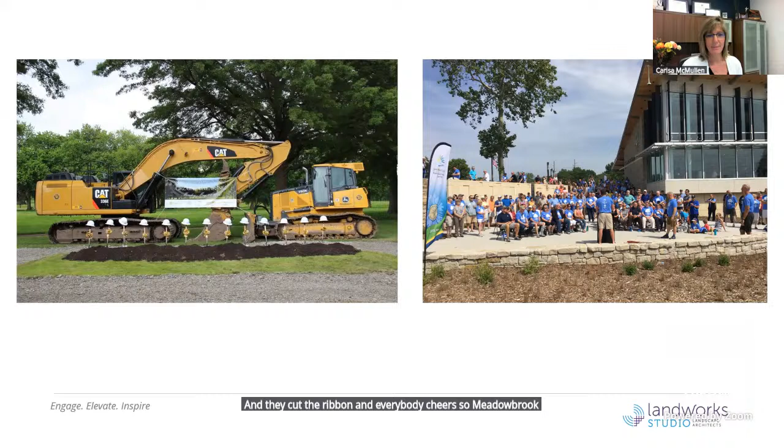So then lastly, I just want to end with the value of this public-private partnership. The project wouldn't have happened without them. The collaborative development and the collaborative work that the design team had with the agency and with each other really created this special place. And as we were looking back on some numbers, now that it's been several years since it's been installed and people have had the opportunity to experience it, this park impacts over 900,000 people every year.

And so when we stop and think about that opportunity, that privilege, this park is not only good for the economy, but really, we just love the smiles and the memories that we know that we're making and that are being created every day in this park space.